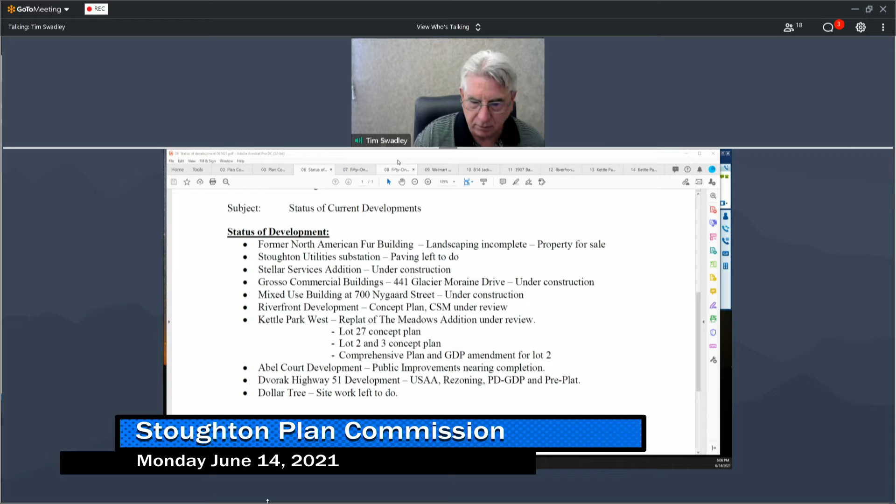Thank you. And it looks like Michael has the status of the development, the staff report on there. Any questions for Michael or myself on that? All right, hearing none, we'll go to the next item.

That's a request by 51 West LLC for approval to rezone lots 7 through 15, 19 through 23, and outlots 1 through 7 within the 51 West neighborhood. I believe there's representatives here from 51 West. We'll have them go ahead and give an overview, and then we do have a need for a public hearing. I know there's at least one person here to speak on that. Ultimately, we'd like to have a recommendation to the city council. So 51 West, go ahead, the floor is yours.

Thanks, Mayor. As noted, this subdivision has been before you a couple times already. We recently had the preliminary plat approved by council. We have submitted the final plat, and we are currently looking to rezone in this first item the conventional zoning parcels. So as you see the yellow dots on the west end, those are single family being the SR3 zone lots. All the green dots are all the outlots, which has stormwater management. Some have trails, or they're going to be dedicated as park. And then the orange dots on the far right, on the east end of 51, those are shown as duplex lots. That's really the general review of this, and open the floor back to Plan Commission.

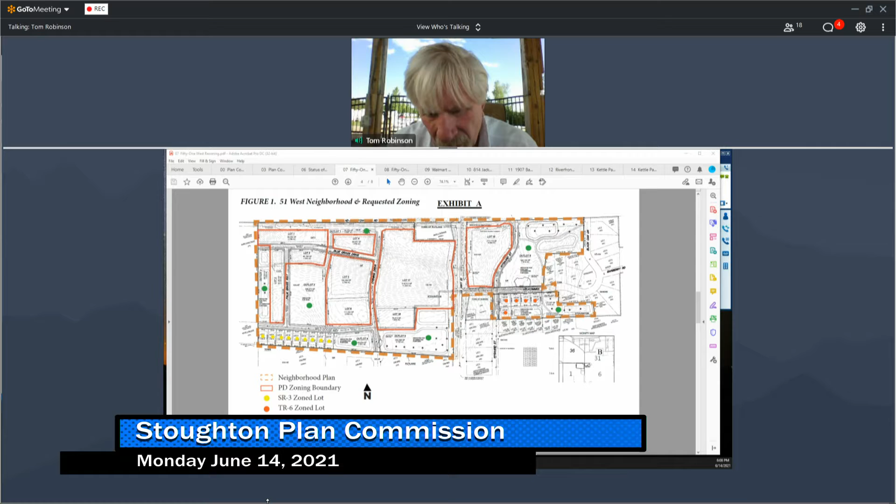I know that Mike Connor is here to speak on this issue. Are you here, Mike? I am. All right, go ahead.

I'm not really here to speak so much on the zoning, but the critical part for myself and other bicycle riders in the city is that a strong recommendation came from the Rivers and Trails Task Force to recommend a connection now across Highway 51, some kind of connection, not in the future.

I think that's one of the things. I want to discuss the problem to be solved. We want to talk about connectivity, how we connect to Town Line Road and how a bicyclist would get out of town, and then talk about safety.

As Phil knows, there's a mad dash, called the 300-yard dash of death, along Highway 51 from Town Line Road to Velkommen Way. So I'm here tonight to express my concern that there's no connection across Highway 51 for bicycles or pedestrians in this plan.

When I was on the Trails Task Force years ago with Helen Johnson, we were talking 30 years ago about the same thing. We said, when that gets developed, we'll work on that. And then one development after another passed.

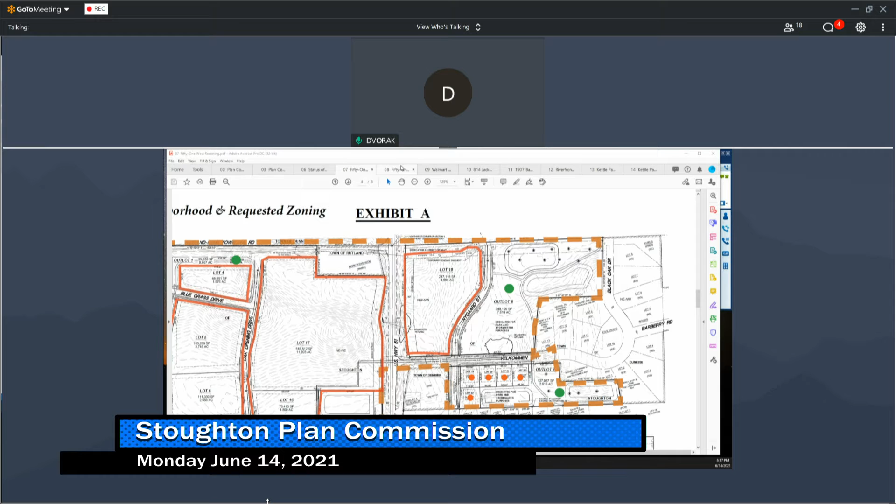So this map, just to give you an idea, I think the DOT is looking at the TIA now - correct me if I'm wrong, Steve - but once that analysis is done, this could move forward sooner rather than later, and then eliminate Velkommen Way. Does that answer your question, Alderperson Carabella? Yes, I think to the extent it can be answered, yes.

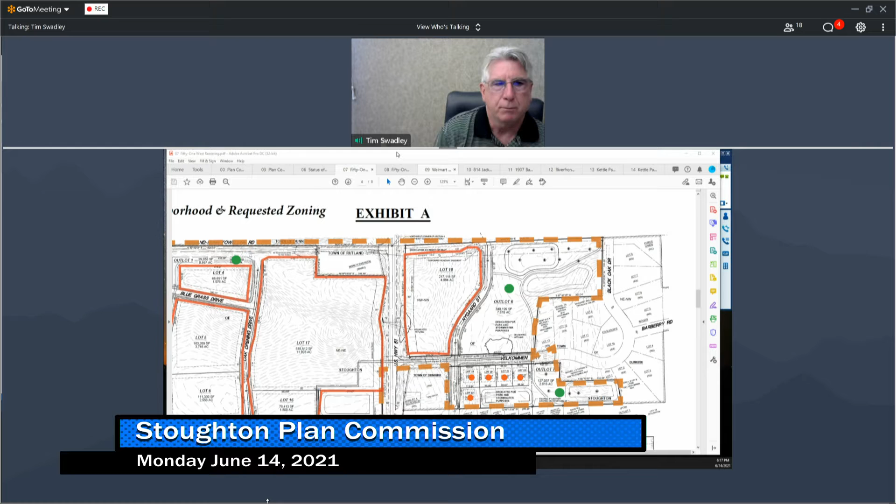Okay, and like I said, we're meeting with them this week. There's a public meeting on Monday the 28th, I believe. It's going to be virtual, beginning at 6 o'clock. The main purpose is to review everything with the business owners, but any other interested parties can attend virtually. I'd be happy to send out the link - if anyone's interested, let me know. It'll be on the agenda when it comes out, but you might want to save the date, or contact me and when I get the link from the DOT, we'll send it out.

Can I ask a question? Sure. It looks like I already have the link, by the way. Okay. What does the interim road mean?

We are going to put in place a rural section road that will provide that connection from Nygaard, the north-south street, to 51, with the intention to close Velkommen Way between Nygaard and 51. It provides access for the neighborhood to the south and the town properties to the east, a safer location to exit, for the long-term plan to have a full access roadway at Town Line, Rutland Dunn Town Line Road. But currently we don't have enough right of way, because the other portion would be for the development to the north, the Linroad's property. So when that develops, or in coordination with DOT on the reconstruct of 51, that's when that full street can be connected. Thank you, appreciate that.

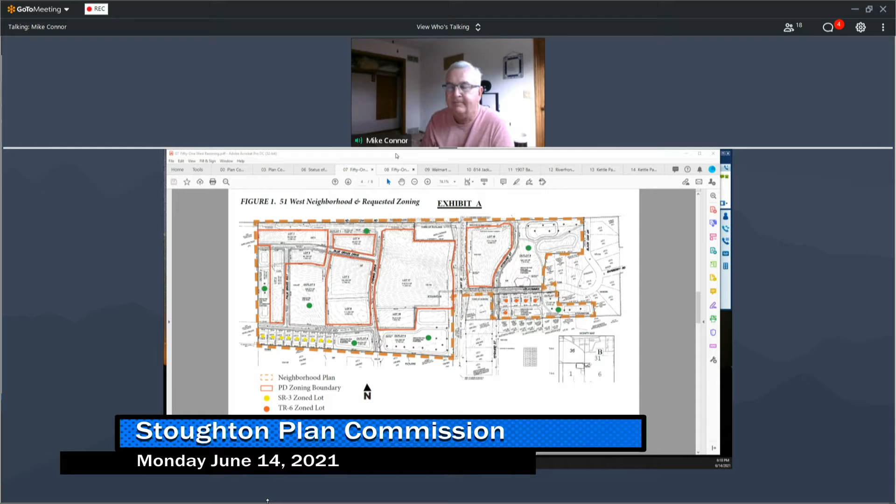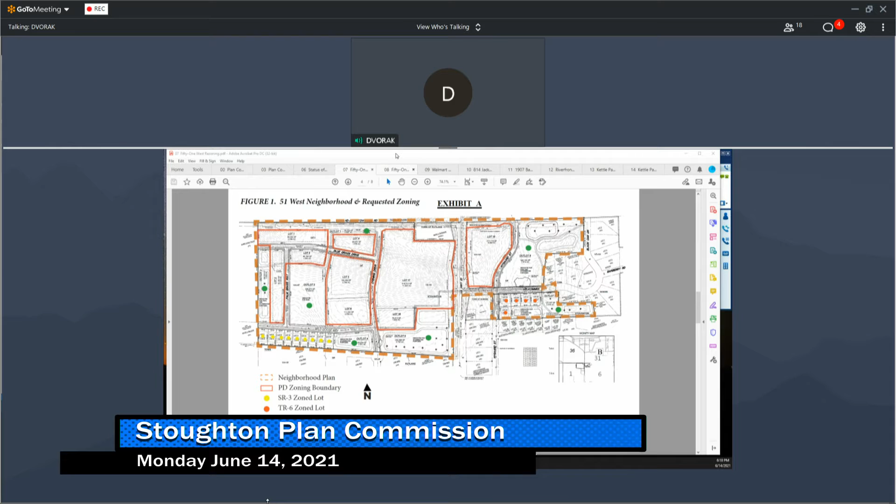Yeah, and the other thing, Bob, if you can help me - your development was how many acres again? I think 68 total acres. Yeah, and do you remember how many acres Linroods have? They have 180 on the east side and 30 on the west side. Okay, so that gives you another data point.

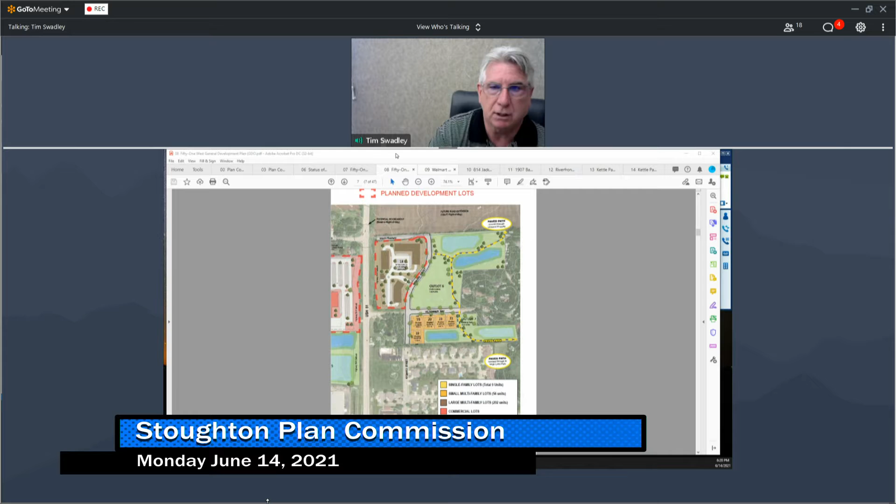Yeah, the topography is kind of the driving issue. Future development is probably going to be quite a few units north of this anyway, so I think it'll work out well. Ideally we'd do it now, but it might be more efficient and cost-effective if we can coordinate it with part of the DOT construction. Hopefully we can work this out, and there's always the question of paying for it, but we can figure that out too. The DOT's made it pretty clear it's not part of their plan, at least not at this point, so they probably wouldn't be interested in it. It'd probably be developer-driven, but certainly the city council will have a say on that.

So let's get back to the zoning, and then if we have any leftover questions, we can save that for the general development plan. Any other questions on the zoning part of it?

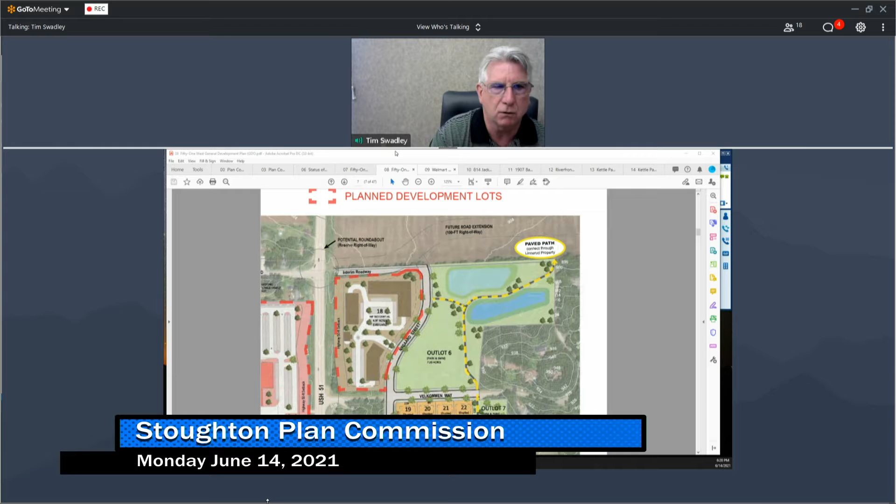All right, hearing none, we're looking for a recommendation to the city council. Would anybody like to make a motion? I'll make the motion to city council. Is there a second? I'll second it. Any discussion?

Hearing none, all in favor, say aye. Aye, aye. And any opposed?

None opposed, that carries. Item number 8 is the request by 51 West for approval of the general development plan for lots 1 through 6 and 16 through 18 within the 51 West neighborhood.

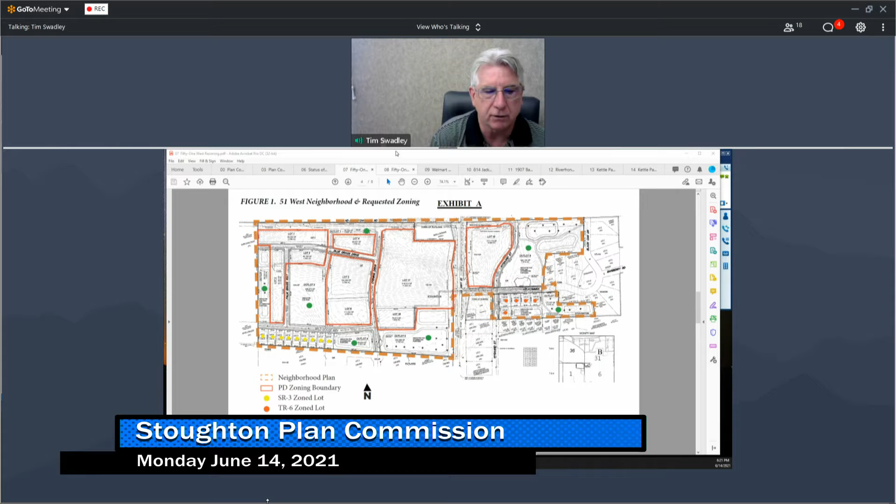Once again, there is a need for a public hearing, but certainly, Steve, if you want to cover this one before we go into a public hearing, that would be fine. Sure, thanks Mayor. So the remaining parcels, as noted, are in the red hatching.

The reason we're looking at planned development with the GDP currently is some flexibility with the type of buildings looking to put in each lot, some reduction in setbacks between the buildings down to 20 feet minimum. But the bigger one is to relax some of the rear setbacks, with the impact being that most of the lots we're looking at here back up onto open space, stormwater, or additional outlots. So it doesn't have that case of needing that additional rear setback where it's onto another property. That's the main reason for those rear setbacks that are in place.

Where there are cases where there are 2 lots back to back, part of that thought to give back is there are design standards in the GDP that handle increased articulation and improvements that would mitigate that compatibility issue.

But again, we're looking at the bigger picture of a balanced neighborhood, especially on the west end where there's more variety of building types. But it is played out where the intensity of the nearby parcels is similar or slightly lower. So it's not like you're putting a single family next to a 5-story apartment building. So that's the flexibility we're looking at here.

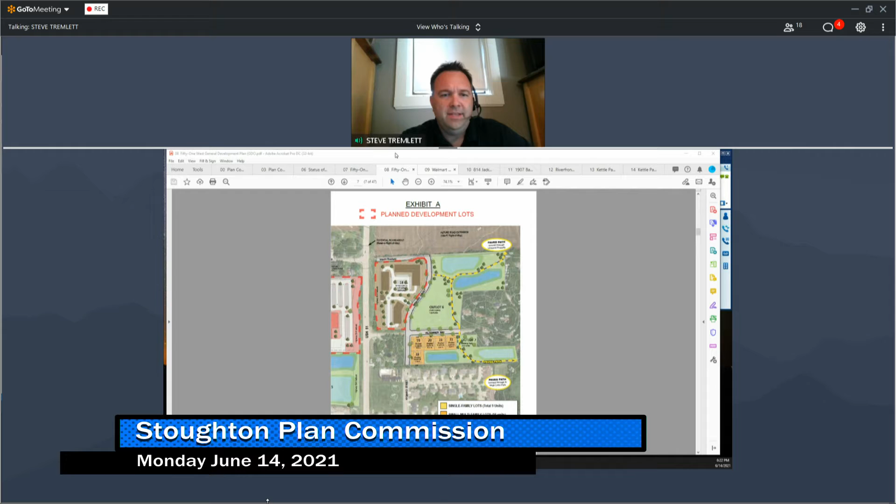There's another couple items, such as if there were a use for the commercial property that would have cart corrals, that it would fit within the existing standards for parking spaces, just for efficiency purposes.

And the last item is allowing for more than one building on a single lot. That's a conditional use permit under conventional zoning. And you still have that caveat of the next stage, the implementation plan, to review it in full. But that just opens the door that you can have multiple buildings on here with a minimum of 20-foot setbacks.

All right, are there any initial questions before we go into the public hearing? Hearing none, we'll close the regular meeting and reopen for the public hearing. I don't believe anybody was signed up for this one. So we'll close the public hearing and reopen for the regular course of business.

We are looking for a recommendation to council on this one. Are there any questions from any of the commissioners? I have some questions, Mayor. Go ahead, Commissioner Barman. So I'll start with my first one.

It relates to lots 1 to 3, where the request is to allow townhouses of up to 4 units each. And I'm just trying to figure out the reason for needing to have that changed to 4 units, when it looks like, based on the plan, that if you had 2 units per townhouse, that equals your 12 units max for lot 1. And I don't really typically see townhouses where you have usually townhouses split left and right, where if they're 2-story, the first and second story are still part of 1 unit. So if that can be explained to me, I'd appreciate it.

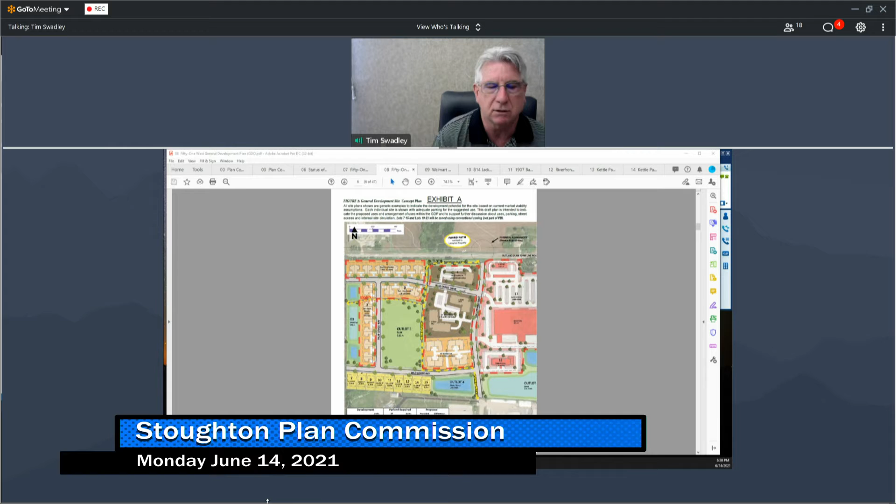I would say that on this project, we collaborated early with not only the fire department, but Stoughton Utilities and Park and Recreation Director Glenn as well. We actually changed some of the way the roads were initially on this project. We had some private roads, and we were able to work with the developer to eliminate them, as well as the dead ends that went with them. So I know Chief Rip felt a lot better about this plan.

So they weren't concerned about buildings being within 20 feet of each other? I don't recall that coming up during our conversations. I could certainly follow up on that if you'd like.

Okay, I'd just like to make sure, because I'm thinking in particular of the property on Main Street owned by the Development Corporation, where they came in with a plan for multiple buildings on that site, which I think might have been 20 feet as well. We had a conversation with the fire department there, and I was just trying to recall what their solution was. I can certainly follow up on that. If you guys send this to council, we can get the question prepared for them. Thank you, that's all.

Should we be sending this to council if we don't have all the questions answered? Well, I guess that's the choice of the commissioners. Like I said, we did review it with the fire chief and nothing came up, so as far as I know everything's good, but I guess that's up to you guys.

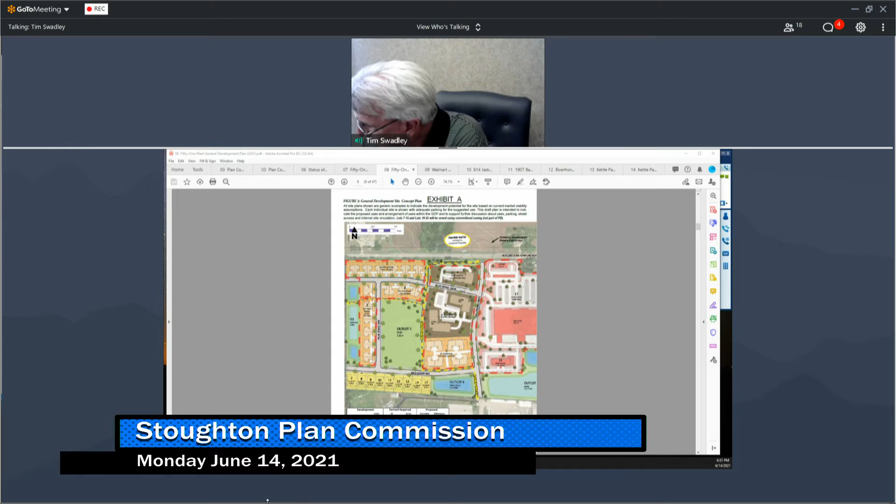I'm hesitant to send this forward, just because having this discussion on council floor, it's kind of like we're passing this buck along and not doing the job we were supposed to be doing at this level.

Council should be looking at this commission as doing its due diligence to answer all the questions before it gets to them, and then they may have concerns afterwards, instead of, well, we need to move this on for expediency and we can let the council duke it out on the floor. And I'm tired of that, to tell you the truth.

I'm weary of having those discussions with lengthy council meetings that go past 9:30, 10 o'clock at night because of actions that were not being committed as they should be in the correct places. So like I said, I'm really hesitant to move this forward until the questions are answered.

I can certainly appreciate that. Had I known this was going to be a question tonight, I would have reached out to the fire chief and had him double check it. It's kind of hard for me to do it on the fly. You just heard him go by in the truck right now. So that's the difficulty of bringing this stuff up at the meeting.

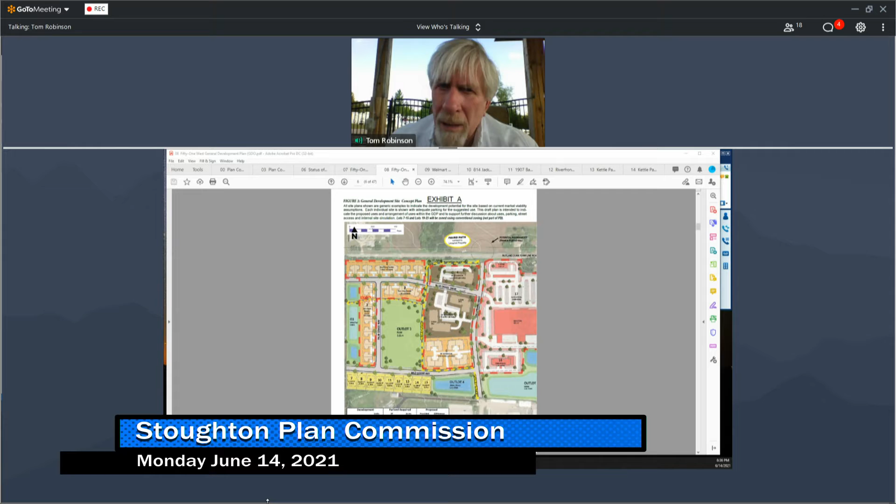I'd like to make a motion that we advance this based upon the feedback from the fire department. Otherwise, can we make a motion to go ahead and advance this to city council based upon the fire department supplying the requested information? We could do that. Is there a second to that motion?

All right, there's a motion. Is there a second? All right, I guess I'm not hearing a second on it, so that motion would die here.

So I guess at this point what we would have to do is see if you guys are willing to get together for a special meeting for this issue. Probably the sooner the better. I think we're hoping to have it on the council meeting for next week.

I'll motion that we do not make a decision on this until after this commission receives the information from the fire department with their review of distances between buildings. At which point in time, then we make a decision. Until that point, we do not move this forward, and we reconvene to make a decision when such information is available.

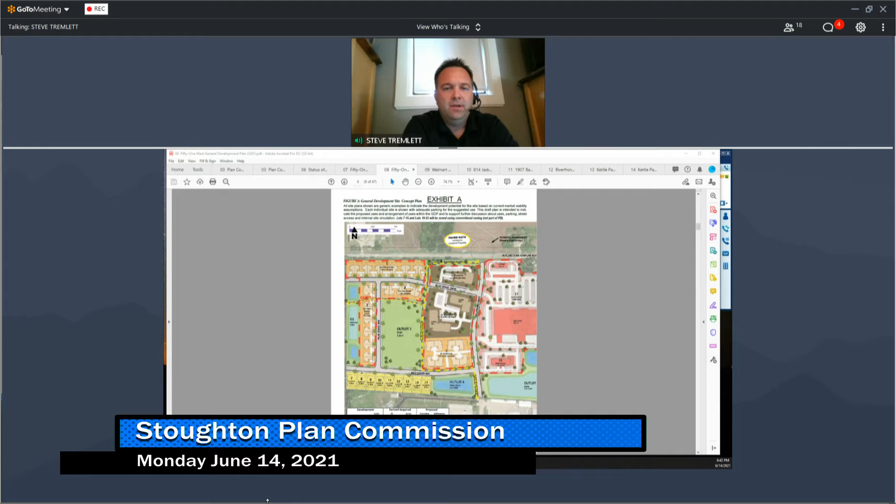Okay, can I add just another note? Sure. If there aren't other questions, and this is an important one, my only statement is, if Plan Commission was going to accept what the fire chief says is a minimum standard for setback and not go beyond that, our request is to reconsider allowing it to be shown there if it's chosen to make that standard different. Council can approve based on that change in number, and then it's up to the developer to decide if that's a good direction ultimately. But if we weren't looking to go beyond what the fire chief has as a minimum standard, it's more of a check and answer versus deliberation in this Plan Commission discussion. If that's the only item, we'd like to keep moving forward, but I know there's already been a motion, I just wanted to state that.

This is Mr. Barman. That's kind of what I was asking. I've never received from the city or from the fire chief a statement as to the effect of a minimum building separation. I just know this has come up in other developments where we've had to go back to the fire chief because we were putting buildings closer than what zoning allowed. Which typically behind some of these issues, I was trying to get clarification on that. And if somewhere the chief has come back and said it's okay for buildings to be 20 foot apart, then I'm comfortable with it. I haven't heard that.

All right, are there any other questions before we move on? Not really a question so much. This is Al, just a comment.

I live about 5 minutes from this proposed development, and I rode my bike up there to check it out. The earlier discussions about access seemed primarily focused on east-west across 51, which I think is needed. But I think somebody needs to look at access for pedestrians and bicycles from this development south, connecting to stores, restaurants, and neighborhoods. I rode my bike up there, and there were a few places that are definitely very sketchy. I don't want these residents to feel isolated necessarily. I think that's probably not a good thing. That's my only comment.

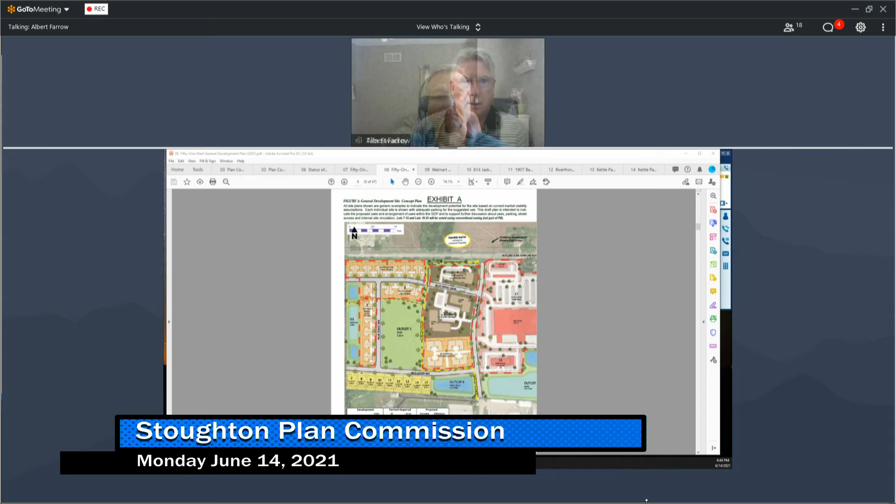All right, anything else before we move on? At this point we'll get an answer, and if it's consistent with what this shows, we'll have to schedule a meeting and send out a notice to see when people are available. Probably won't take that long, but it's just a matter of getting enough people together to have that discussion.

Item number 9 is a request by Jennifer, not sure of the last name here. I'll say it's Paquin, for a specific implementation plan amendment, SIP approval for exterior color and signage improvements at Walmart at 2600 State Highway 138.

Is Jennifer on the line? I think there was somebody trying to get in earlier from Walmart. Yeah, Amy, I think is on. Yes, yep, there she is. I'm here, can you hear me? Yeah, go ahead, Michael. You can put the pictures up, and Amy, if you want to kind of walk us through this. Sure.

Good evening, so I am working with Walmart. I'm with PB2 Architecture and Engineering, I work with Jen Paquin. You got her name exactly right. We are working to complete an interior remodel and exterior updates to the Walmart store.

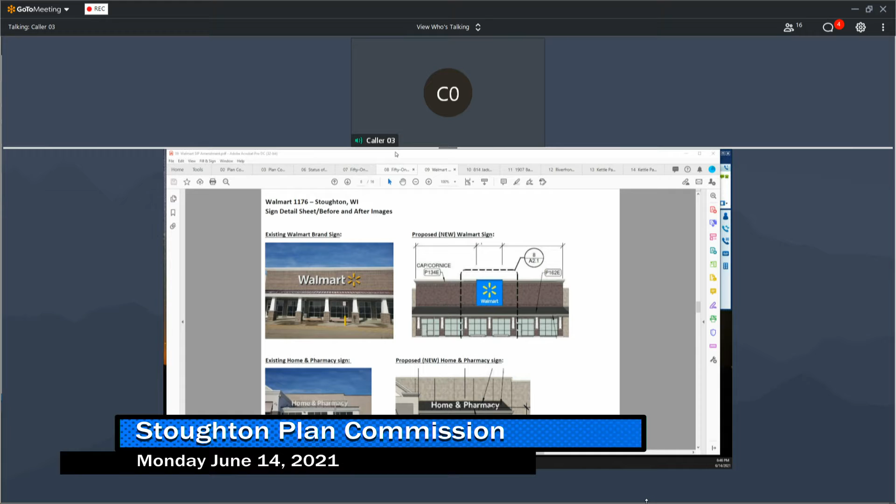Regarding the signage, most of what's being installed is replacement, nearly like for what's there now. There will be one new pharmacy drive-through sign proposed to be added on the front of the building, to give people coming in from the front of the store a direction to know which side the pharmacy drive-through is on, if they're unfamiliar with the site. The existing pharmacy drive-through signs will get a like-for-like channel letter replacement on the side of the building, and a similar sign will be added just around the corner on the front as a directional sign for customers entering the site.

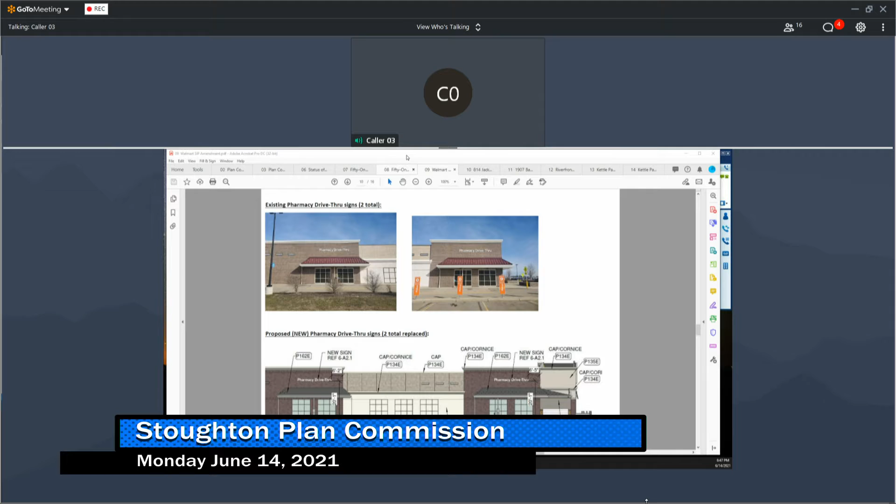The pickup sign is also being replaced and relocated, moving to the other side of the front facade, closer to the outdoor area, as the parking spaces designated for online grocery pickup orders are shifting to that side of the building to reduce congestion with the pharmacy drive-through and pickup, which was becoming too congested. So that sign is relocating to help more clearly identify where pickup orders should be picked up.

There's a pharmacy drive-through directional sign proposed, and moving the pickup sign to the other location helped clear the spot to create that directional space. The existing signage on the building totals about 661 square feet, just over. With this new sign package, we're reducing that by quite a bit, down to about 371, almost 372 square feet total, simply from the reduction of the main Walmart logo.

Regarding the paint, in other jurisdictions around the country, Walmart has implemented much more blue accent paint than what is currently shown on this building. But this store has special elevations that were approved when it was built, so rather than incorporate the whole Walmart branding scheme, we tried to keep it as close as possible to original. You'll see the grocery, the background behind the grocery and pharmacy, rather than being blue like another location you may have seen, is dark gray. The existing brick will not be painted, only EIFS materials and things like that. If there's CMU, that could be painted, but they will not paint any brick on this building. That's a very quick summary.

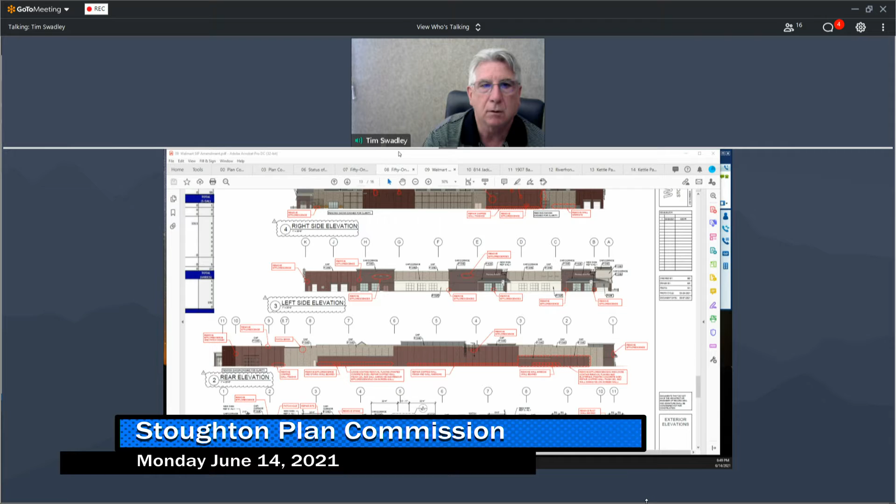Just one clarification. I was a little thrown off at the end there. I thought we were just approving signage changes. Are we actually approving paint changes as well? I believe that was on the application. Yes, double checking. Yes, both signage and paint were on there.

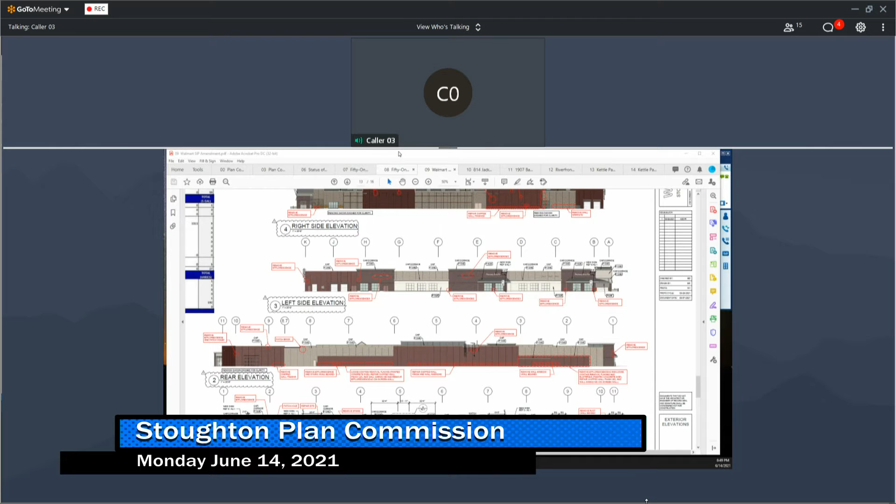And the paint, as you can see on the elevations, what we're really speaking about are neutral grays, gray tones. There's very little of the Walmart brand blue, only behind the main brand sign. All right, I see it now. Thank you. Sure.

All right, any other questions? All right, then I guess I would entertain a motion at this point. I'm sorry, I was muted. Oh, sorry, go ahead, Tim.

I just wanted to say, yeah, I'm glad that they're keeping up appearances, so to speak. They're putting a lot of time and effort into the building, and it's great. My question is, will they be replacing the dead vegetative material that they have in the parking lots and on the perimeter of their buildings? Also, to spruce it up?

I can ask them, or that can be considered a condition of the approval if you like. That is not generally part of the remodel scope of work, but if it's something that they need to incorporate into the scope of work, now is certainly the time to do that, and you have the option of requiring that as a condition of the plan commission approval.

I personally would like to see that. I'm very frustrated when I see commercial developments put in their original plantings and then not keep them up. So seeing that this is such a high visibility commercial area, I would really like to see that kept up, because I think they have a really nice landscape plan for this building.

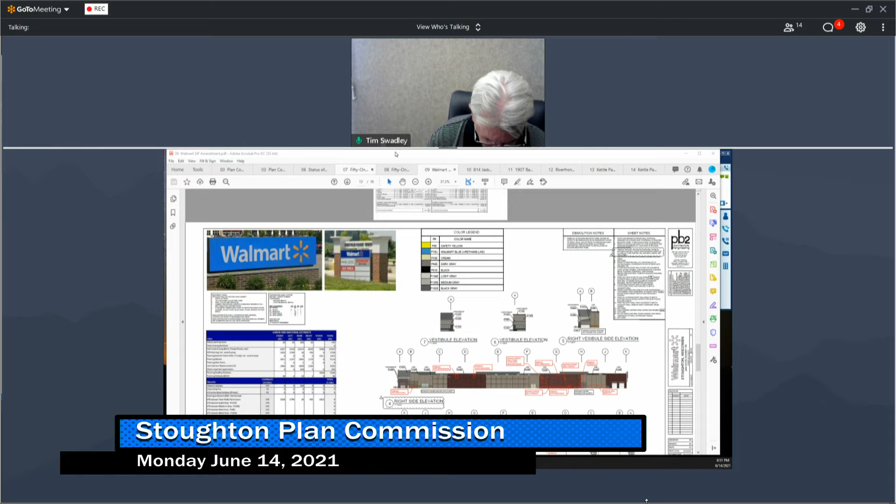All right, any other questions? So I guess I'm looking to entertain a motion. I would move to approve this with the stipulation that they consider upgrading their landscape to its original intent.

All right, is there a second? I'll second that. All right, any? I actually, can I have a question about the motion? Sure, go ahead.

My question is about the way that Commissioner Majewski said they considered. Does he want to make this a requirement, or just that they consider doing that? And can we make it a requirement? That's what I'm not sure if we can make it a requirement. Can we?

Yeah, I guess commissioners, it's up to you what you want to do. I would vote for the amendment if we put the word 'require', since it would seem like, since they have gone to the trouble to do some landscaping work, but if it's not worked out, or for lack of a better term, and they're doing work to improve the look of the whole location, I would think that would be something they would want to address, and maybe they're just not aware of it. So if we made it a requirement, and if we can do that, I would like to see that added into the amendment.

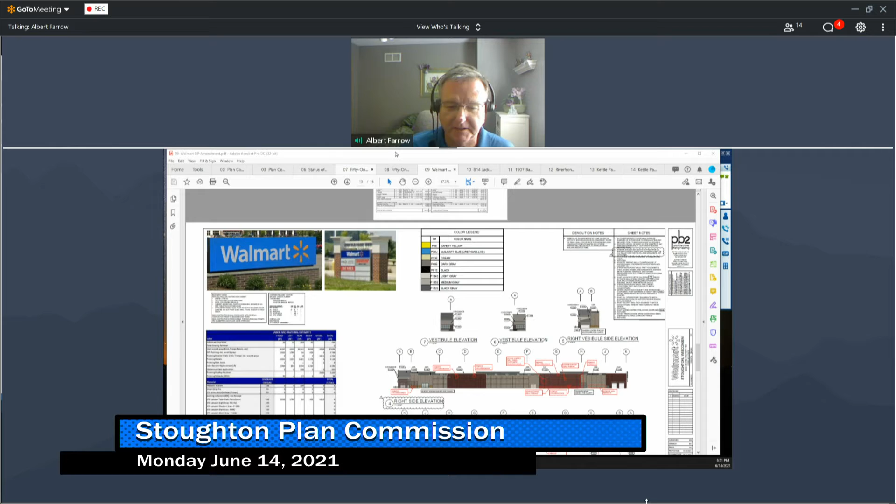So the way this will work is we'll vote on the amendment, and if that passes, it becomes part of the actual motion. If it fails, we go back to the original motion as worded. Any questions on the amendment? Hopefully we didn't confuse you, Al. No, I'm not confused, I was just considering whether it was really appropriate, but that's a newbie thing.

All right, all in favor of the amendment, say aye. Aye. Aye. Aye. Any opposed? None opposed, so that carries.

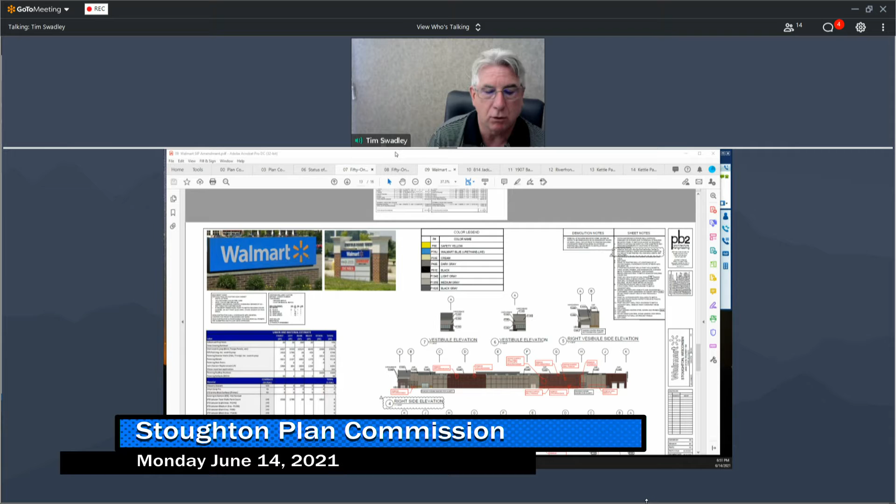So we have the original motion as amended. Basically, we're saying we'll approve the signage under the condition that they'll also restore the landscape to its original form. Any questions on that? Hearing none, all in favor say aye. Aye. Aye. Any opposed? All right, that motion carries.

Thank you very much. What's the timetable for the work? This should be starting, I would say, come August, September, once we can get all the required building permits in hand and get a contractor on board. If you need a copy of anything from us, we can get that from Michael. Thank you very much. Good evening. Thank you, you too.

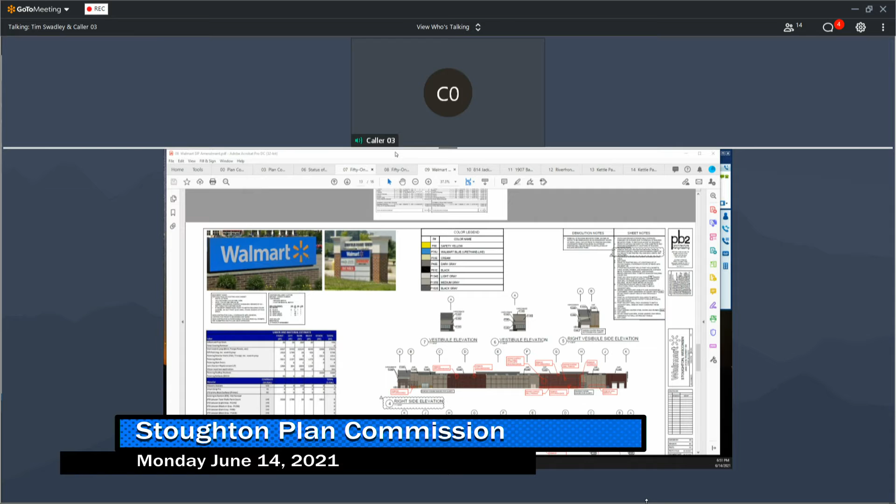All right, next item is number 10, a request by John Gallagher of Gallagher Tent and Awning for approval of a freestanding canopy to load and unload patients at the Nazareth House at 814 Jackson Street. It looks like we have a picture here. Is there somebody here from either Nazareth or Gallagher who wants to talk about this? Not seeing anybody.

So basically, is this in addition to the building, or is this a replacement? No, this is not attached to the building, it's a standalone canopy, a requirement for Housing and Urban Development. I think they're going through a process to refinance or something like that, so it's a requirement as part of that for exiting. They're going to be spending a lot of money on interior and exterior for exiting and things like that.

All right, anybody have any questions on this one? I have two. Go ahead, Al. Oh, I saw that one comment was the signage wasn't allowed on the front, is that correct? That's true, it had to be on the building. And is that even if it was part of the fabric? That's true too. Okay, just curious, I thought it looked nice myself.

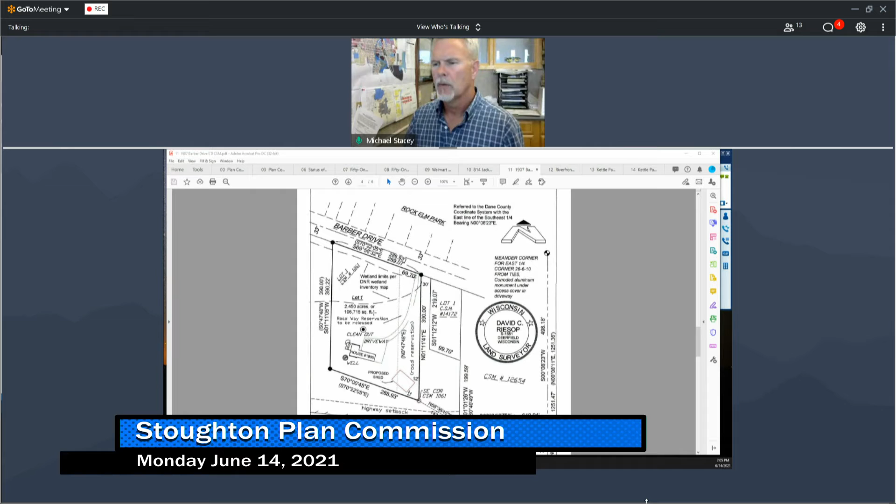Any other questions or comments? Otherwise, there is a resolution in the packet, and we would need a recommendation of that resolution to the council.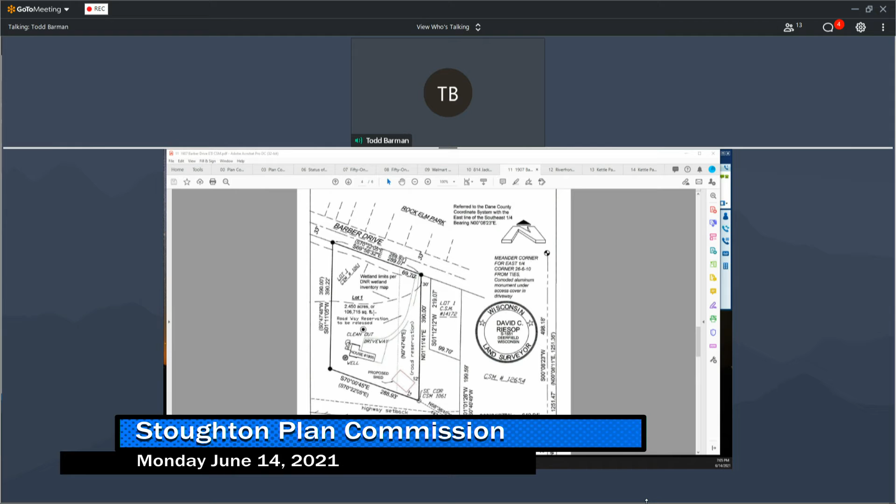I'd move to approve. Is there a second? I'll second. All right, a motion and a second. Any discussion? All in favor, say aye. Aye. Any opposed? None opposed, that motion carries.

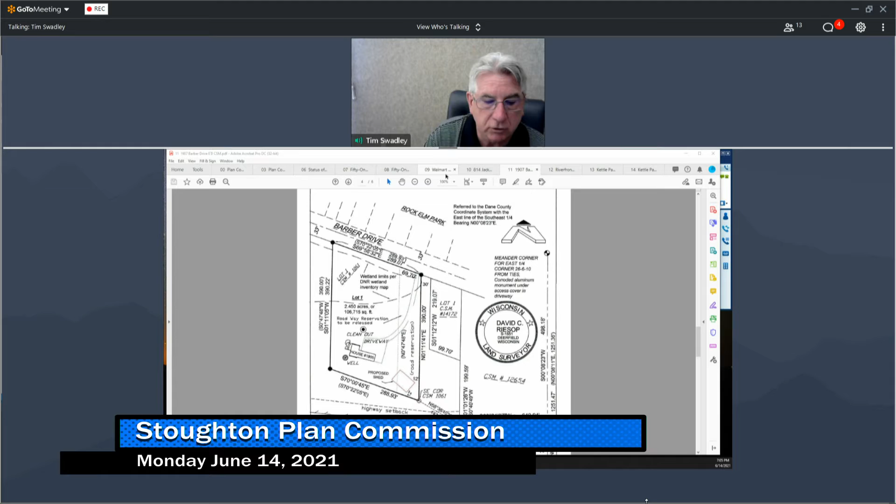Item number 12 is a request from Curt Brink for a plan development concept plan review for the riverfront development. On this one tonight, we're not looking for any action, are we? No, it's just a concept. All right, so Curt and some of his team members are here tonight to go through the plan. How'd you like to start it off?

Probably right where we are. Can you hear me? Okay. Doug Hirsch is in Portland, Oregon right now, and John Thousand, my civil engineer, is finishing up a project in California. So I'll be on tonight for the concept plan. What you see here right now is the total site of basically 10.48 acres.

The left side, units 1 and 2, is what we're proposing for the first phase. As we move along, you'll see some of the concept designs. That's phase 1. The first building being 26 units, and the second building being 48 units. What we're doing is having a lot of 3-bedroom units in the project as we're working towards that. We're moving more towards that for families.

If everybody remembers when we had the original public hearing at the fire station, there was testimony of people trying to move to Stoughton while looking for a house and put their kids in school, but there was no place with any 3 bedrooms. So this is part of what it is. We've also had comments from people whose kids are gone and who would like to stay in Stoughton, but would like a place big enough to live, and wouldn't necessarily want to move to Madison or another place. So that's part of what we're doing here, to make it not just a lot of 1 bedrooms.

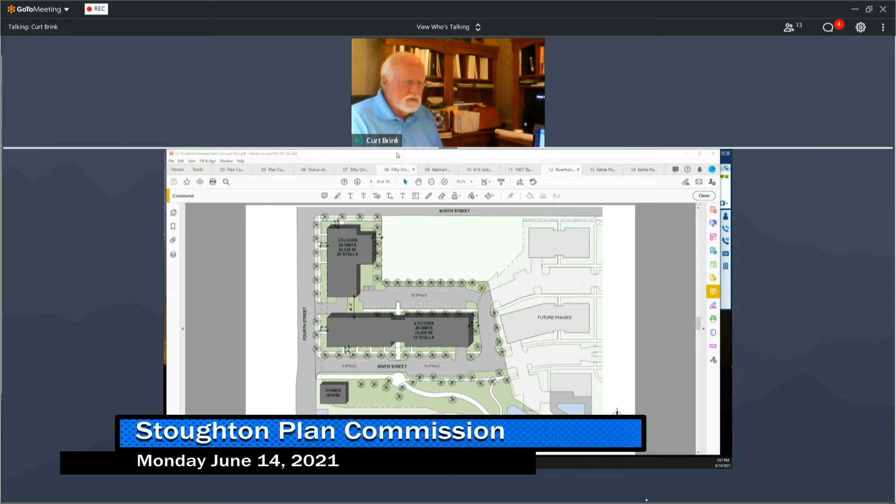Okay, this is the building that would be on the corner of South and 4th Street. Now, how this evolved was through quite a few meetings with the redevelopment authority. The initial concept I handed in there was bigger houses. We went through different things and really evolved the design because what the RDA wanted and the mayor wanted was to give a statement on the corner as you turn down Main Street.

What this is, as we evolved through it, is kind of a duplication of what I call the blacksmith building, which was torn down farther down South and 7th Street. What we've done here is added one floor, maintained the integrity of it, and given it the brick - we really like the style of that building. So in a sense, we're building it brand new, but honoring the old legacy.

And it's a 3-story building, and then that upper part is kind of a loft area for the apartments, and it's brick on all sides as we're doing it, because what's critical as we go down there - the first buildings are the most critical because you have to set the tone for what's going there.

Because right now it looks a little run down and everything there, but I think as we evolve through here, we're really trying to make quite a statement building that sets the tone for everything.

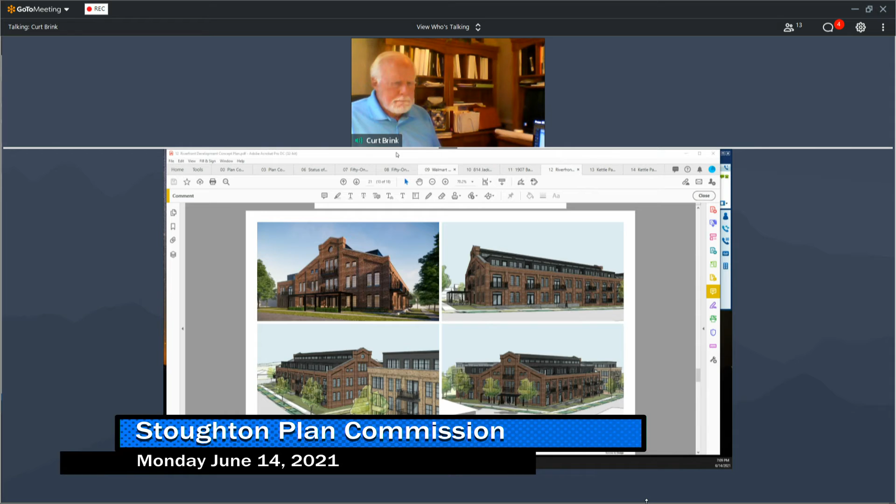This here becomes more of a classic warehouse look. What we're trying to do is evolve the buildings as we work through, so it looks like it's been different buildings over time and not just one big project - that's some of the comments we got back from the RDA.

So the bottom part is 3 stories and we have a 4-story setback along River Street, and then you see the power station in front. When we were in front of landmarks, we set our buildings on 4th Street back enough so that as you drive down 4th Street, you can still see the power station.

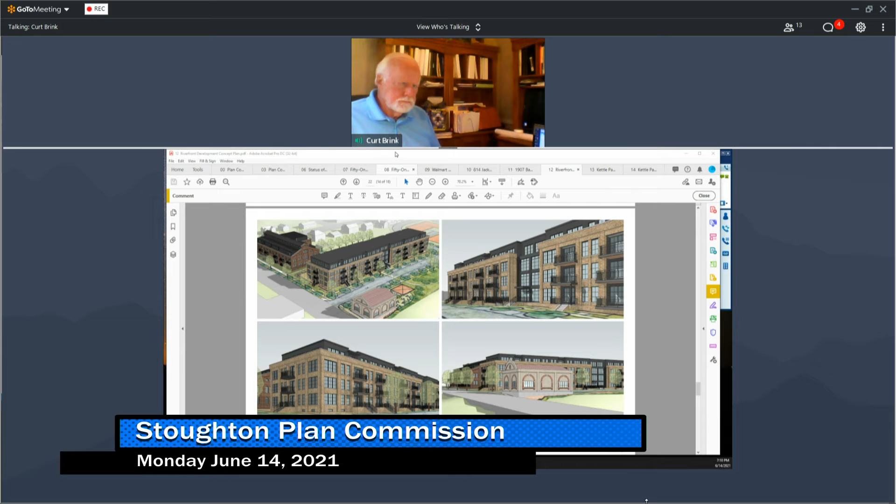If we could go back to the full site plan, that'd be great. Sure - yeah, that'd be perfect.

So as we've evolved through this, for lack of a better word for the road, we just call it River Street running through here. Working with city engineering, Strand, your consultants in that, we tried to keep the improvements efficient, not wasting any money, since River Street would take the water main, the sewer, and everything.

The beauty of this site - at the top, South Street, the elevation is 854 above sea level, then we go down to the river at 835. So we have a normal slope.

The advantage to this site is cutting across from building 2 across the river, just in front of the power station - you have your major force main that leads down to the sewer plant. There's capacity within the existing force main, which I think is a 24-inch main, to handle this whole site going into it.

So we've set our elevations of our basements to where we gravity feed into it completely, and then we run the water back through to meet the fire demand as it goes through. You can't see it on here because we're still working on that part. As we get into the next phases to the right, the center part is what we call where 6th Street would be if you took it all the way through.

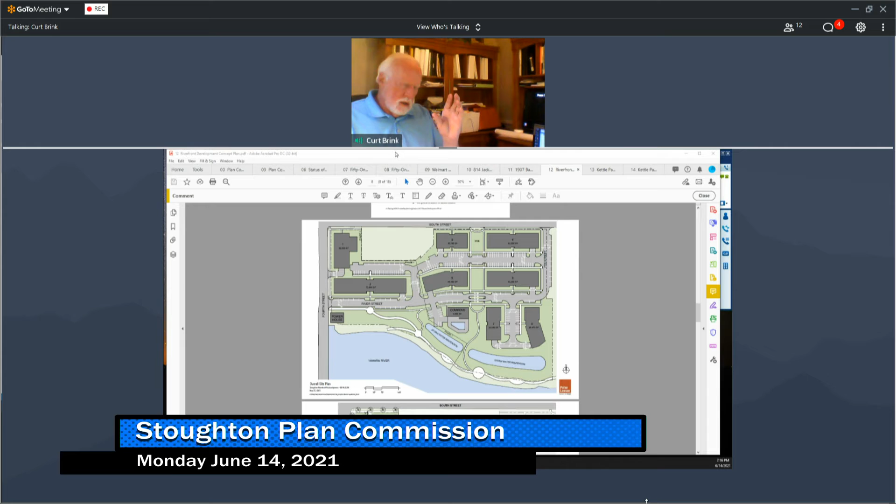We've modeled this to meet all those requirements, and we've run the pedestrian path that the city is doing, matching elevations with our engineers and Strand's engineers working together so that's all complete as we move forward. This is why we wanted to get you on the concept plan, as we come back with buildings 1 and 2, trying to do a general development with oversight for predictability, but do the SIP on 1 and 2. That's basically what we've got for tonight, and we're looking for your feedback.

All right, thank you, Curt. Any initial thoughts or questions from commissioners?

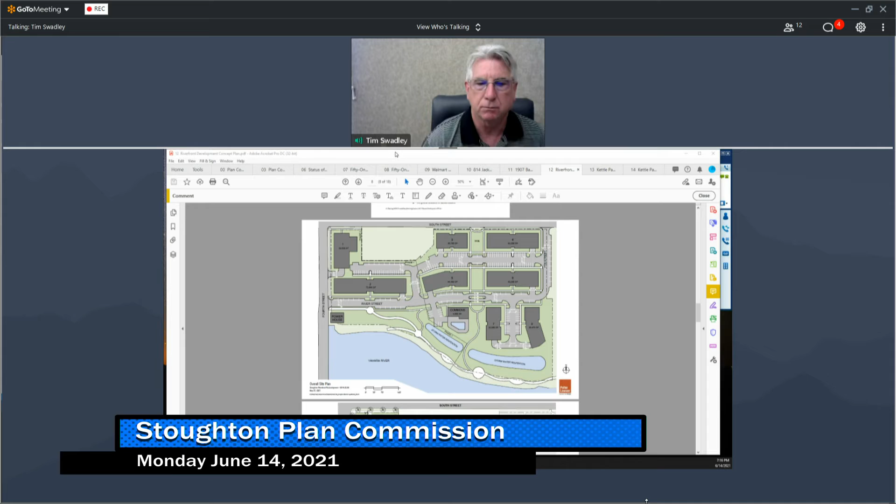Just one, I really like this idea. When I first got here, I rode my bike down there to the old powerhouse and I said, geez, this site is gorgeous, surprised they haven't done something with it. So really exciting to see this.

A question in general, since this is going to have a waterfront, a bit of a water view, is it envisioned to be more upscale, more affordable, or somewhere in between? This is more market upscale here. Okay, that's kind of what I assumed. Thank you, that's what we almost have to be with construction costs.

The other thing we went in here, which was way too long ago when some people posted, we're a great distance from the river with our retention ponds up in front, where we're a few hundred feet back before we get to the first buildings. What your Parks Department's been trying to do, and what the RDA's been working on, what you guys are getting grants for, that is public. The river walk down there is not private, it's public as it works through from the grants you're doing. And it's the bicycle trail that eventually ties through, and it helps Stoughton become a destination, but the residents there can just interact with it, and the river starts becoming an asset instead of being closed off from it. Instead of us moving all the buildings down to the river, to deal with FEMA, the stormwater, and the different definitions of water quality, we're able to try to maintain the highest water quality as it goes through here also.

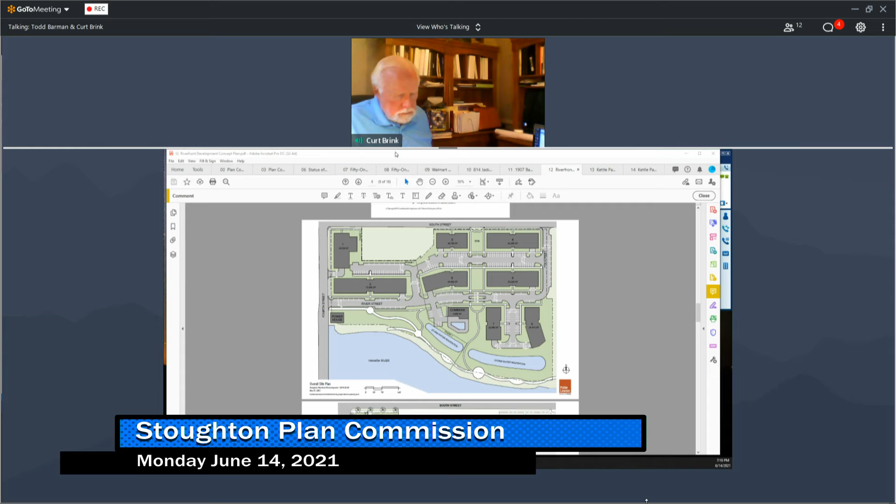So my comments here, I really like the plaza design that you got along, that lines up with 6th Street, that essentially connects up toward the gazebo and the park near the fire station. I really like that. I like the fact that this whole development is focusing on residential without a lot of insert of retail commercial. I think there's a temptation sometimes of trying to put retail along the riverfront. In a lot of cases, and in other communities, that might make sense, but I think here it's more important to keep the retail downtown and have this be a great place of more people living proximate to downtown, which I think is going to put the pressure on the city to make 4th Street better over time, to connect people up 4th Street to the core of the commercial area of downtown, as well as continue to have that strong 6th Street connection. So I like all that.

I also want to give you kudos for Building 8. If I'm guessing correctly, Building 8 is shaped the way it is to provide better views of the river and the riverfront for people who reside within that building. I think it's creative and unique to the way you've lined up the buildings to provide the best views of the riverfront for as many units as possible.

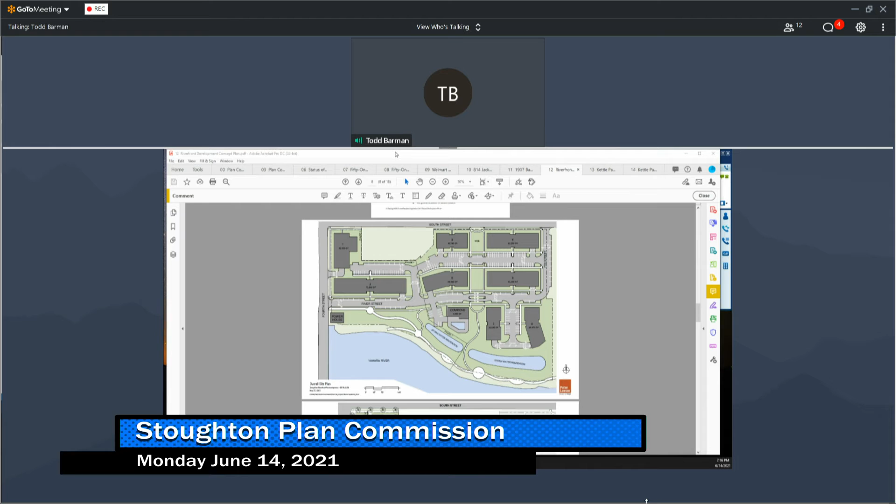Another thing that doesn't show in this, because we're just two-dimensional, the buildings along South Street are a good 20 feet higher than the lower levels of the other buildings as we work into this. And what's going to be really nice is when we bring this back through, we'll have the 3Ds to show that. You made a very interesting comment on the commercial.

Commercial is a very difficult product to deal with now, and the people that rent from us in the commercials are having a tough time right now. The one thing I liked about this site, and the reason we weren't going to put commercial in, is your main street is a great street and has fantastic potential. So the beauty of this development is people drive through it, go down, then go home. Or, like a day like today, you go home and just walk down Main Street. You go to the bars, you can do some shopping, and some of the retailers, like even Brian from the Cheesery, they'll stay open at night, and it ends up becoming more of a destination place on Sunday. And I think there's some excitement that's even being proposed for the old movie theater, that Sunday there might be people come down here.

One of my oldest stepsons, they had a place upstate New York, and East Chatham had a downtown like this, and everybody was down there on the weekends. So that's why I didn't want to compete with the retail down there, because I've always felt if they can get an extra 10 people a day in, it's unbelievable what they can do. And that's what we modeled this to do, to enhance the downtown. For us to build new commercial and have somebody qualify that and try to make it work, it's really tough. But you guys are working real hard and keep trying to improve the downtown, and I think you're getting some nice new momentum going.

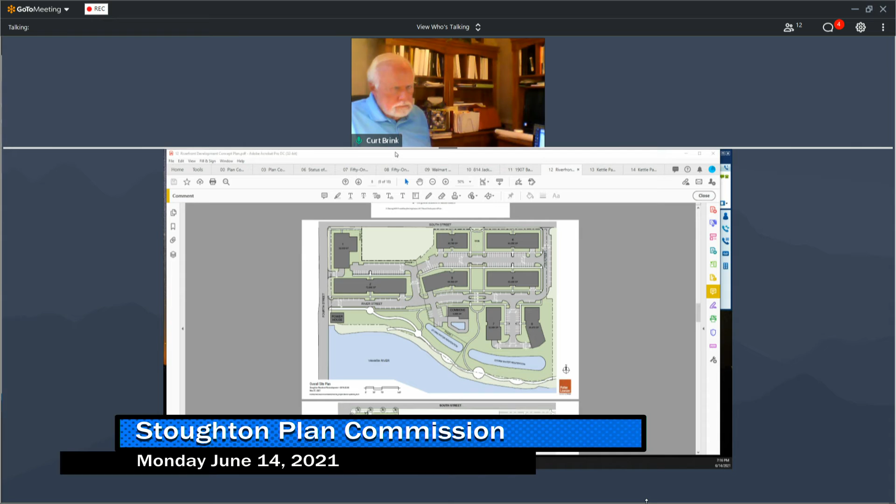All right, any other thoughts or questions from commissioners?

So I think the idea was to at least get it in front of you and see where we're at on this. Those on the council or the RDA have probably seen, if you've watched the meetings, where we're at with the site and the materials management plan that's been worked on to get us comfortable putting the rest of the language in the agreements. Once that's done, I'd anticipate some approvals coming through here as well. We just wanted to get you familiar with what's going on down there, so that's why they're here tonight.

So any last questions on this? All right, well thanks, Curt. Thank you, have a good night.

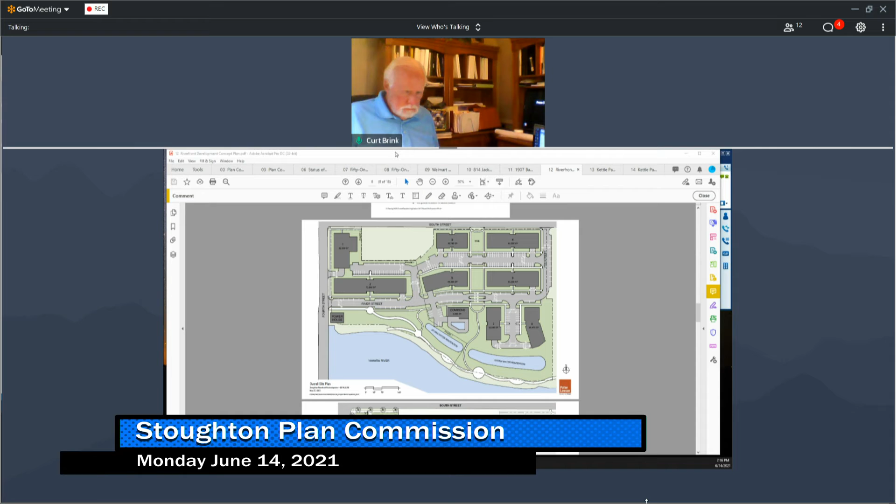Okay, item number 13 is a request from Jessica Vaughn, JSD Professional Services, for Planned Development and Conceptual Plan Review for Kettle Park West, Lot 27.

So this one here, we just want to get you guys up to speed on where they're at. We've worked with Forward Development staff-wise to get to this point, and wanted to get it in front of you so you could see what we've been working on. Jessica, are you on the line? Jessica is not, this is Brent Ellison with Forward Development Group. Oh okay, go ahead, Brent.

Thank you, Mayor. I just wanted to run through the concept plan here and answer any questions or comments, and get your initial feedback from the commission so we can incorporate that and move forward. So what you see before you is Lot 27. It's 6 buildings, each building is 4 units - there's 2 two-bedroom units and 2 three-bedroom units. They're 2-story structures, so they've got a residential mass, scale, and finish to them, and they're all along a shared alley off Cromwell Court.

So this is part of the larger Kettle Park West development, where you have alley lots and single family residences. This offers an extra product type that isn't there right now - a more affordable option with regards to those single family units that we have there. To your south you have the Tru by Hilton Hotel, and the retirement home - I forget the name - Park Senior Living.

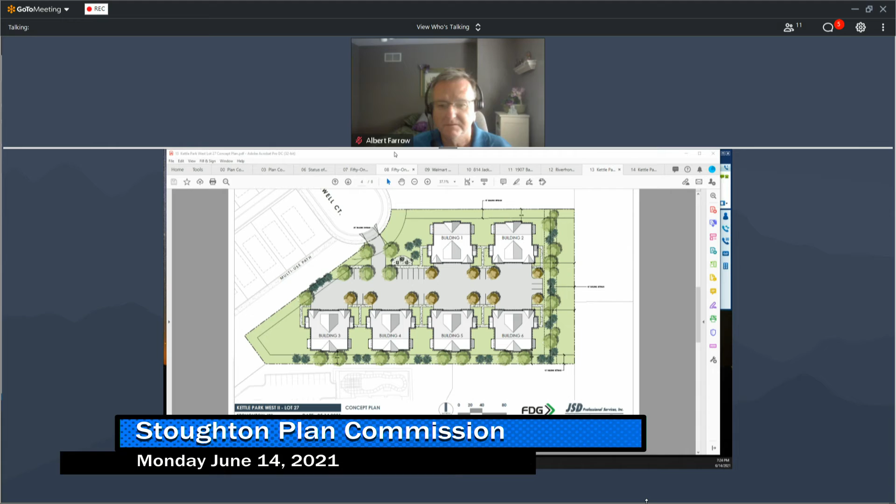And actually, you might be able to pull up our website for the meadows. That gives an overview of the lot layout and everything. All right, just give us a moment while we do that.

All right, well, I'll ask a couple of questions while we're finding the other map. Off of what you have colored here, there's a note for the multi-use path. And I was wondering how you can explain how what I think is lot 27 ties into that multi-use path.

So that multi-use path connects Cromwell Court down to Jackson to provide access down there. It would also be the front of the alley lot products, with an alley running parallel to that multi-use path to the northwest of it. So it's really a collector for those alley homes, and then provides that connection from Cromwell down to Jackson.

So just so I'm understanding what's designed here, between the multi-use path, where the wording is, and the colored area of lot 27, is that actually an alleyway or a roadway surface? That's not green space. That is green space.

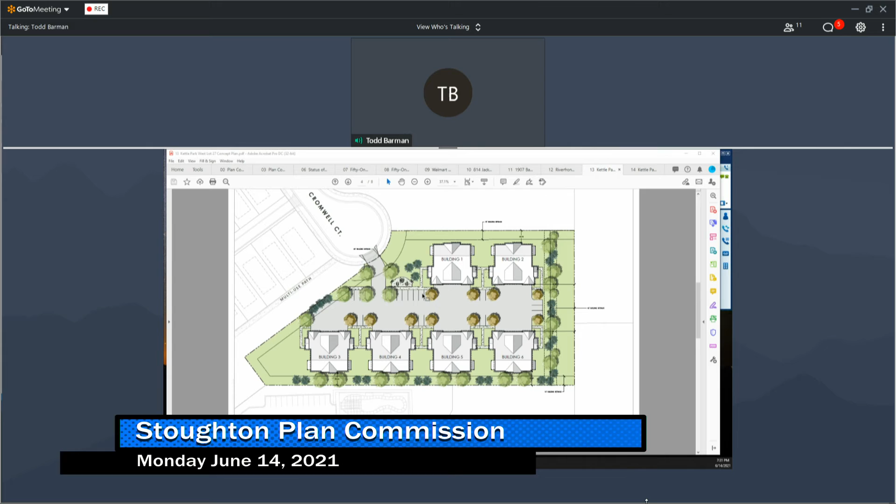I would like to see some stronger connection, because even if I wanted to go up to the multi-use path via your driveway, there's no sidewalks on either side of your driveway that connects back up to Cromwell Court.

See, Todd, this is Dave with JSD. We had that connection made at one time. That's something we can certainly put back into the site plan.

The sidewalk that would be directly west of buildings 1 and 2 at the entry there would continue across and perpendicular. We could create a perpendicular connection into that proposed multi-use path for the alley product. That's something we can do.

I'd like that, and it wouldn't hurt my feelings at all either if you still had some sort of sidewalk connection up to Cromwell Court, because through your entire development we're trying to encourage people to walk the sidewalks and enjoy the porches and walk the neighborhood, besides just the multi-use path. It just seems like we don't have a connection to the rest of the neighborhood pedestrian-wise.

You've got it internally, but then it's just vehicles going from your parking lot up to Cromwell Court. Great point, and we can certainly make that happen, as well as a connection to the sidewalk, so they're not walking on the pavement.

Thank you. And then before I turn it over to everybody else, just to be consistent with my earlier questions on another development site, how far apart are your buildings from each other? Is this 20, 30 feet? They're 20 feet apart. These are 20 feet.

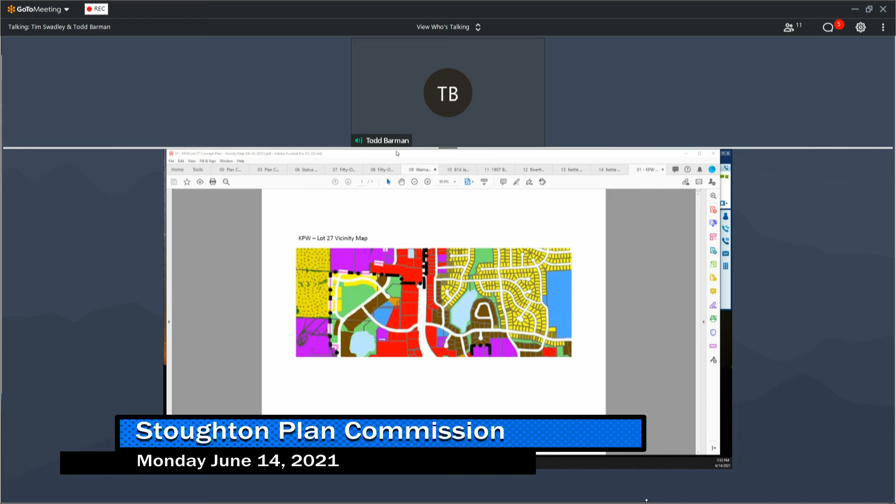So as soon as we are able to get confirmation from the fire chief, we'll know whether or not, as a general rule, they're comfortable with that kind of spacing within Stoughton. Yeah, and the fire chief has joined the call here. So Josh, if you want to address this one, you certainly can.

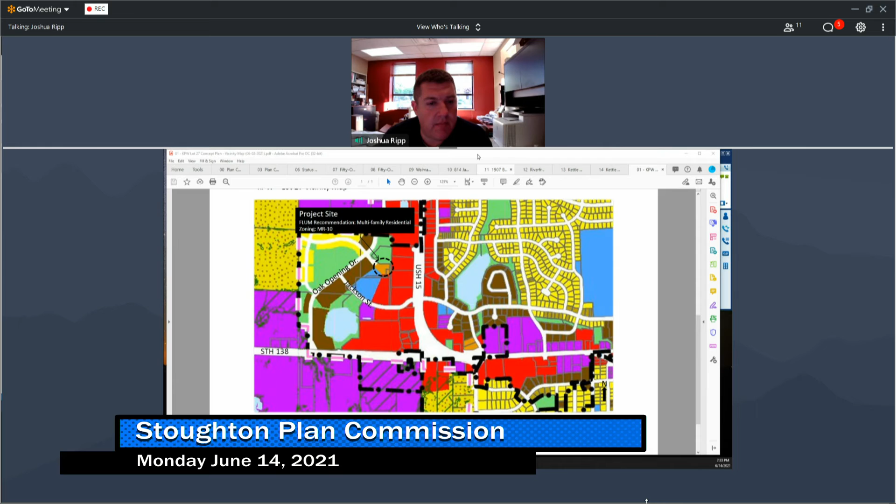Good evening, everyone. I've talked with my code enforcement officer, Deputy Chief Mark Miller. Code-wise, we're okay with it. There are other spots within the city where we are approaching the same kind of distance, so we're okay with it. As that development progresses, we've got some recommendations on where we would like to see hydrants placed, but as far as the spacing goes, we're comfortable with that.

Just for the commission, if I can ask, what is the minimum distance you'd want to see between buildings? Is 20 a minimum, or does it go down to 14 or 10, or what should we be looking for as commissioners when we have concept plans in front of us?

Well, really we don't have a number in mind for the fire department wise. We just follow whatever follows the International Building Code side of things, and I don't have that number in front of me. But with these buildings and the way they're configured, we're anticipating them being sprinklered anyway, being four unit buildings. So I think more of the issue distance-wise has to do with the comfort of the people in them, looking out their window and seeing another building that close.

This is very similar to what was built in Oregon, in Bergamot, same product. Fiduciary had developed that housing there, but we can certainly provide photos and more information as we go through the process here. It's trying to create the affordability. Buildings 1 and 2, we can provide more separation, but that may take away from the green space amenity area. But again, we'll take all the recommendations and incorporate them into the site plan going forward.

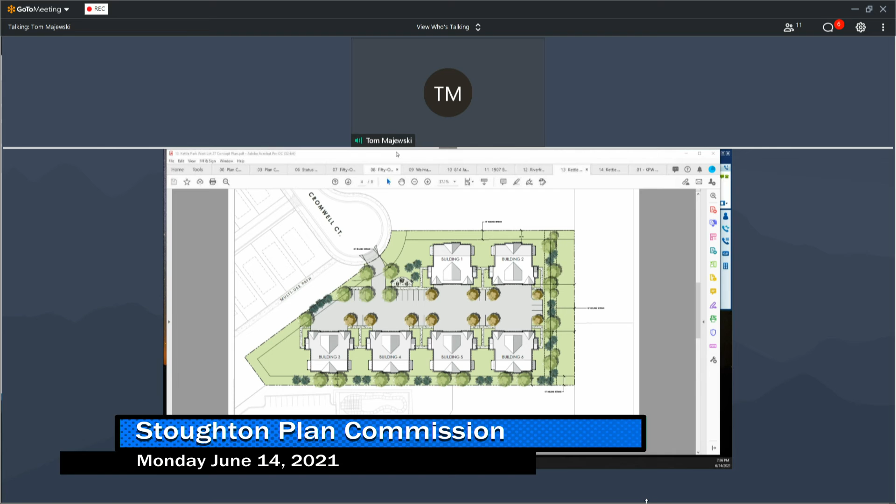I agree, I think it's just easier for plowing, but I think they can pull that snow off and still make those maneuvers. I agree with you that it does look more appealing, more aesthetically pleasing to the resident. It will also enhance the property values down the road when those trees mature. Good point, thank you. All right, any other comments or thoughts?

Okay, well, I'm sure you'll be seeing probably another variation of this at some point, but we appreciate the feedback from the commissioners. So we'll see what the team comes up with.

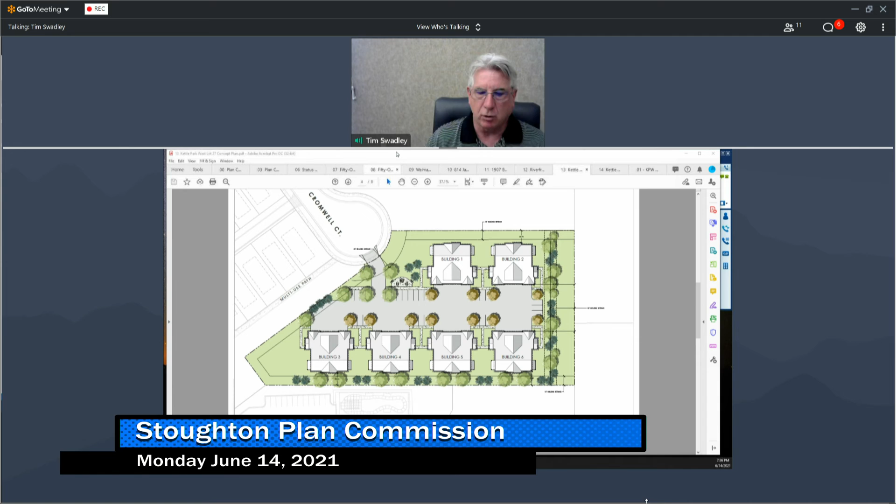Next item is also from JSD, for conceptual plan review for Kettle Park West lots 2 and 3. You might recall this was originally 2 lots, and then we did a CSM and divided it into 3. Lot 1 is where the 3-unit commercial is slated to go with a paint store and a sub shop. We're here to talk about lots 2 and 3. Go ahead.

Thank you, Mayor. So what we're proposing here is a multifamily 76 units, 4 stories, on lot 2. This would be a 4-sided architectural unit, and the density would be 25 units per acre. The intention here is to have a lot of surface or street activity along the building and connectivity.

If you recall from our lot 4 comments or discussions, there was talk of north-south sidewalk connectivity. So we did incorporate that along the east side of the building, since we weren't able to incorporate it along Kettle Park Way. We wanted to bring that over here, and that provides a nice street front transition between the commercial of lot 1 and the more residential of lot 2. Ultimately this becomes a larger mixed use development split between the 2 lots.

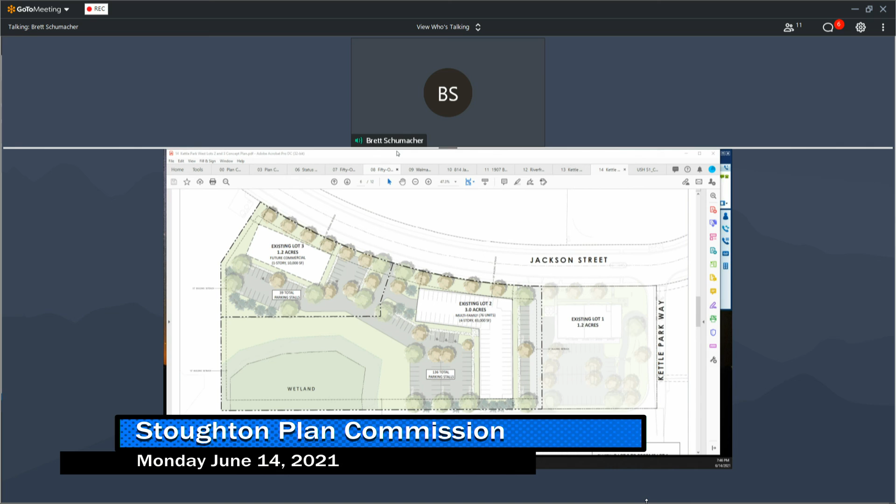All right, any other questions from commissioners? Dave, is that a single buyer looking at that commercial space on lot 3, or more tenants than that? A single buyer that would like to own their parcel, so that would be a land sale for us.

It would be a fantastic use for not only the whole development, but for the single family. It really brings everybody together if they choose this site. They are looking at other locations within the community as well as downtown Stoughton. We met with their ownership group about a week ago and gave them a CAD file that they'll use with their architect to lay out designs showing outdoor areas connecting to the building. We'll learn more about their objectives, but can come back to the plan commission prior to making a submittal, addressing comments shared tonight as well as any site plan changes related to that end user.

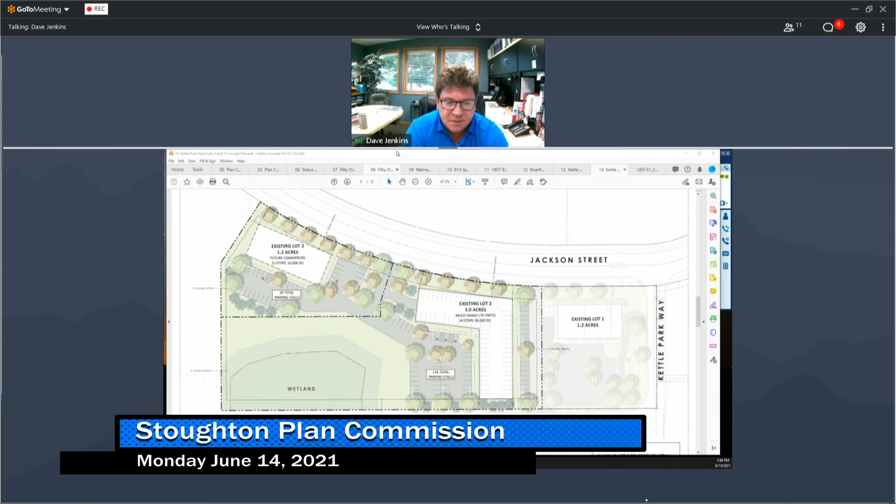All right, thank you. Anybody else have any last minute thoughts? I'm sure we'll be seeing this at least one more time, maybe more. I would suggest we come back another time to show site plan modifications based on what we heard tonight, and provide another drawing that shows a little bit of massing as you come down Jackson, with connectivity to sidewalks, and maybe show a little more amenity around the wetland with grades.

Sounds good. Thank you very much for that, and we'll look for the information. At this time, commissioners, since we have Chief Ripp on the call, I'd like to go back to the item we talked about earlier. I think it was item number 8.

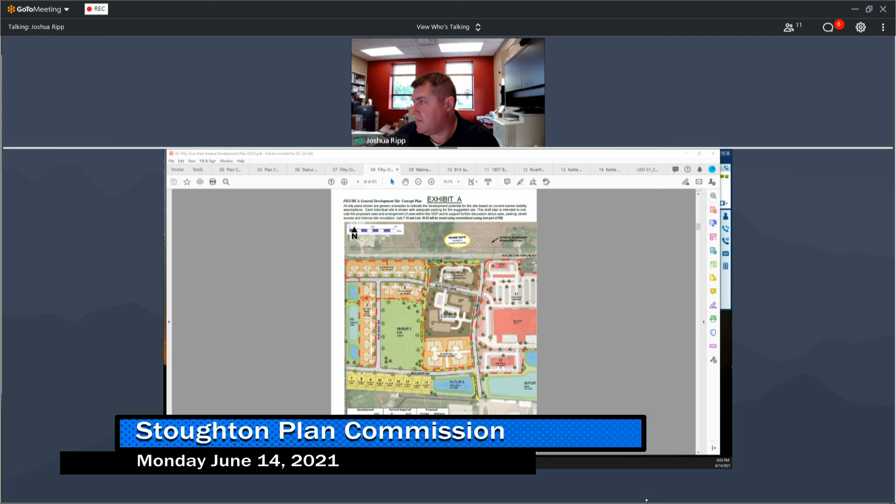Michael, if you can pull that map back up. Here we go. So, Josh, the commissioners had some questions about this, similar to what you just answered on the other development. I think it was either Todd or someone else who had really the same overall question. You could feel free to ask Chief Ripp.

I'm the one who started it, so I'll ask the question. I know with these development plans, the developer often proposes changing the setbacks and the distance between buildings, and in this particular proposal it included having buildings within that 20-foot distance again. Because of other developments, we've talked about that from a safety perspective, and it sounds like, based on an earlier conversation, that 20 feet, particularly on lot 2, 3, and is that 4 up at the top there in the orange area, is the primary area. It doesn't sound like it's going to be an issue with the fire department to allow those buildings to be within 20 feet of each other.

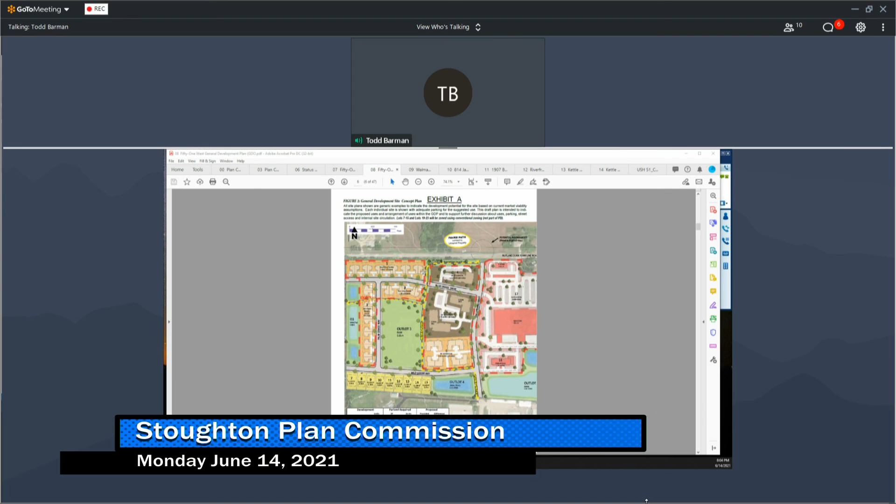Correct. In the building code, there are some adjustments made to the construction fire-resistive requirements as the buildings get closer together to help deal with that—1, 2, and 3 hour rated construction for that. So I'm comfortable with that in the grand scheme of things.

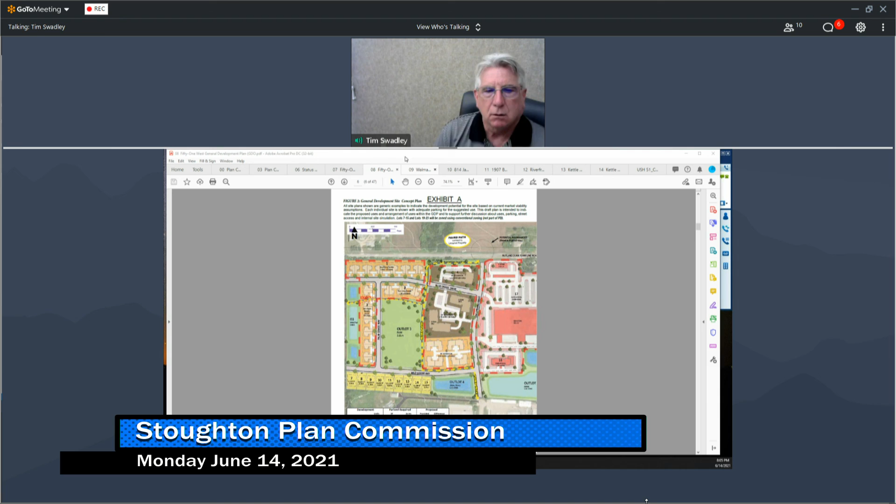Just knowing how that's going to go, and I'm trying to get on my map here. So right now we're looking at the west side map on our map. I was just trying to get a closer look at it. Is there, Mike, can you zoom in?

You might be able to use your mouse on your computer, or you might be able to enlarge it.

Chief Miller and I hadn't done any measurements on figuring out what the actual distance was between these. So I'm okay with 20 feet. Less than that by much, I'd be starting to get nervous for us to work between. But 20 feet I'd be comfortable with.

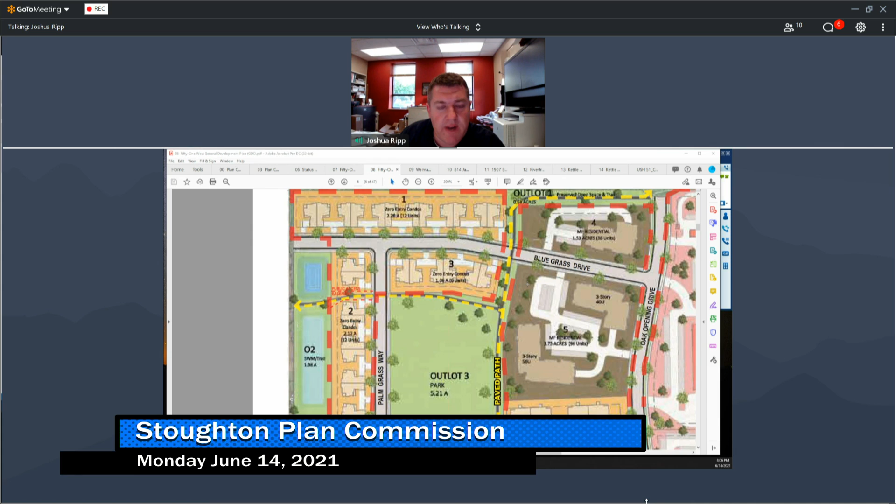Thank you. Did anybody else have anything on that issue? I'm wondering if that gives the commissioners enough information to make the recommendation to the city council.

Well, we had the earlier motion. Do we need to start over from scratch with a new motion then? I think you can handle it two ways - the motion really said you wanted to talk to the chief, you did, or you could reconsider this motion. You could probably do it either way. We'll get the gist of it if that's something you want to do. I'm just trying to save the special meeting, that's really what I'm trying to do at this point.

Well, I would propose that we have satisfied the conditions of the earlier motion by having this conversation with the fire chief, and I would move that we approve this and send it to council. Is there a second? I second it. All right, any discussion on this one?

Sorry I couldn't get the chief on earlier, but he was probably out screaming out of town in the fire truck. He was nice enough to join us when he got back. Hopefully it was a false alarm. Yep, just a malfunctioning detector. I'll take that any day of the week, especially on a commercial property.

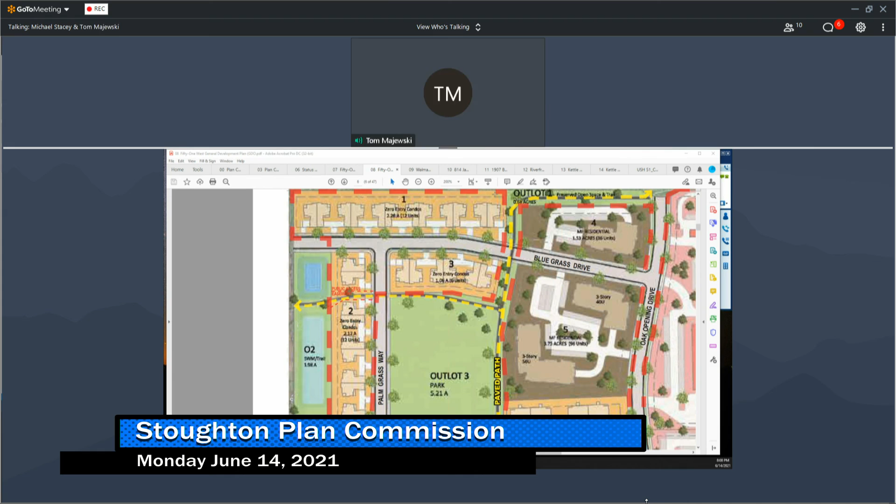We know that we'll have the concept plans coming back. Anything else from Michael from your end? You're on mute. Yeah, I can hear you, but I can't hear you on the screen. That's good, because I was talking to myself. I think we've got Isham Street platting coming. I don't know if we want to discuss face-to-face meetings, but we need to talk about how that's going to work.

I know they wanted to discuss trail requirements for developments, so that's on the horizon, and review parking lot and drive-through safety issues - I know that was another hot button item. Also changes from a GDP to an SIP, I know you wanted to discuss that too. So that's where we're at. Anything from the commissioners for a future agenda item?

What we can do is send out a survey for you guys. It seems like we have the technical ability to do in-person or hybrid meetings if we want people to Zoom in and or show up in person in the council chambers. We have that capability and can record from there as well. We did a couple test runs last week and feel confident we can do that without any major issues.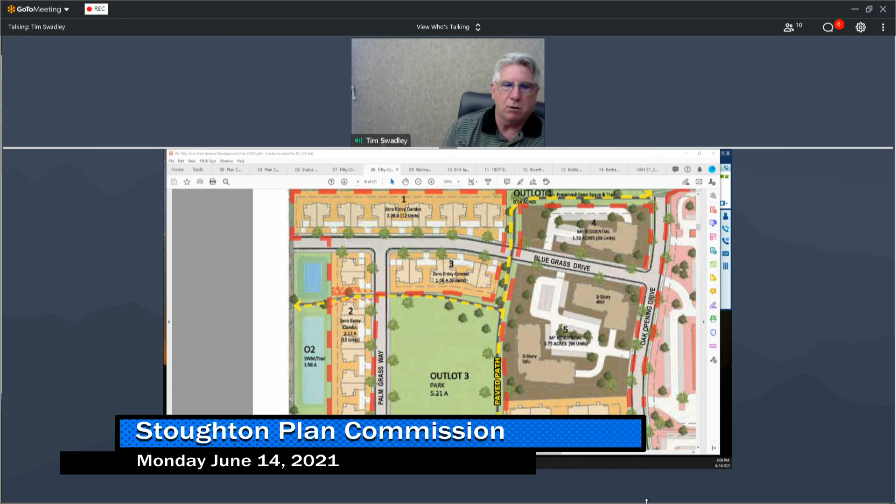I think if you'd like, we can reach out to you confidentially, individually, and you can let us know if you're comfortable coming back. I know the city council members all are - in fact we're planning on doing that for the committee of the whole this week. Hopefully come July at the meeting, maybe we can go either hybrid or you can come in person if you wish. Unless there's somebody who really doesn't want to do it, they could always just log in virtually. But that's probably the way we're going to go.

I guess that's pretty much where we're at as far as the agenda for tonight. So I'd entertain a motion to adjourn. So moved. Adjourn. Second. All in favor, say aye. Aye. All right, we are adjourned.